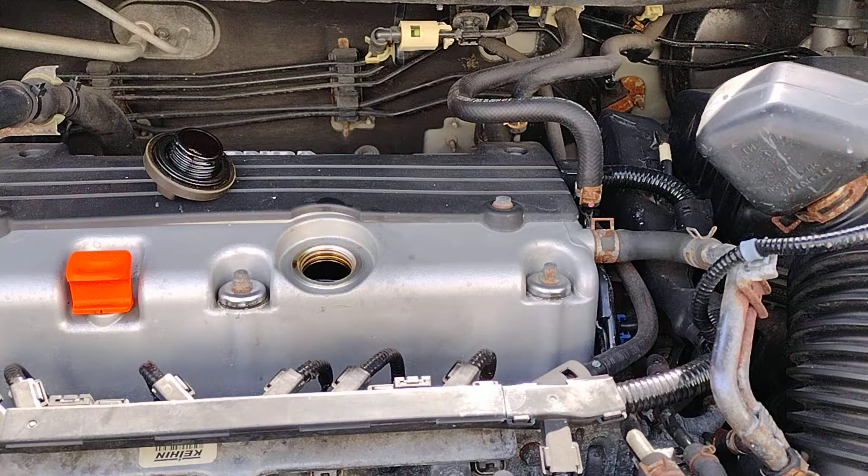Alright. Well, I have a lot of gunk in the engine. It's a 2010 Honda CR-V. The oil was very low. I had to add a little bit of oil, and actually there was like a quart and a half.

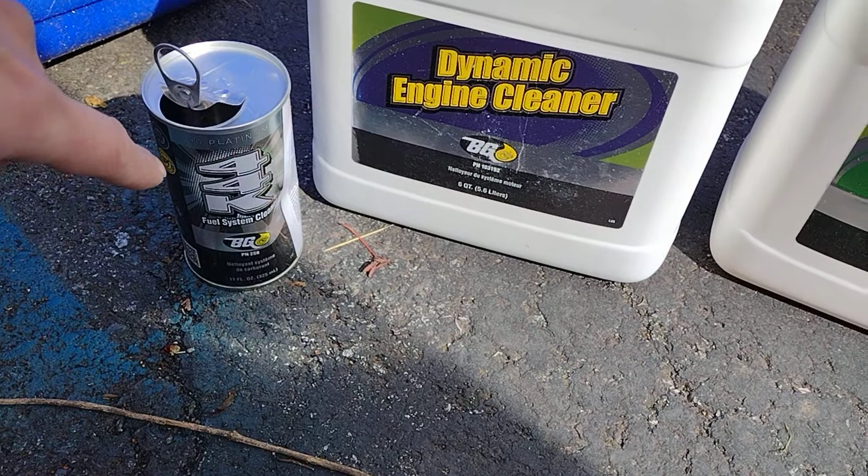So what I'm gonna try to do is I'm gonna kind of like clean the inside of the engine, and I have a product for that. I ended up buying this product. This is from BG. It's basically a dynamic engine cleaner, and you have the rinse oil. It comes with an oil additive. They call it the MOA, and it comes with the Platinum 44K. This is a fuel system cleaner.

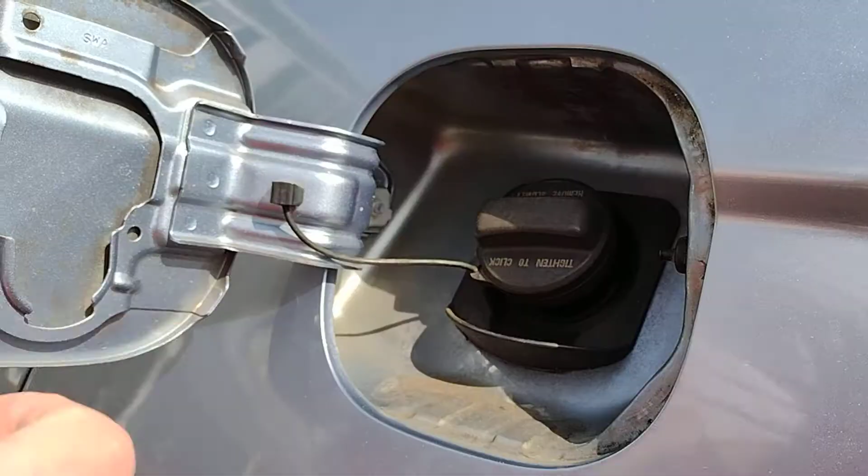I'm just gonna go through the whole process. I figure I'll just record it and show you how I do it. Alright, so what you gotta do is you gotta open up your... By the way, you gotta fill up your tank first. So make sure you fill up the tank in the gas station. Then you put the funnel in.

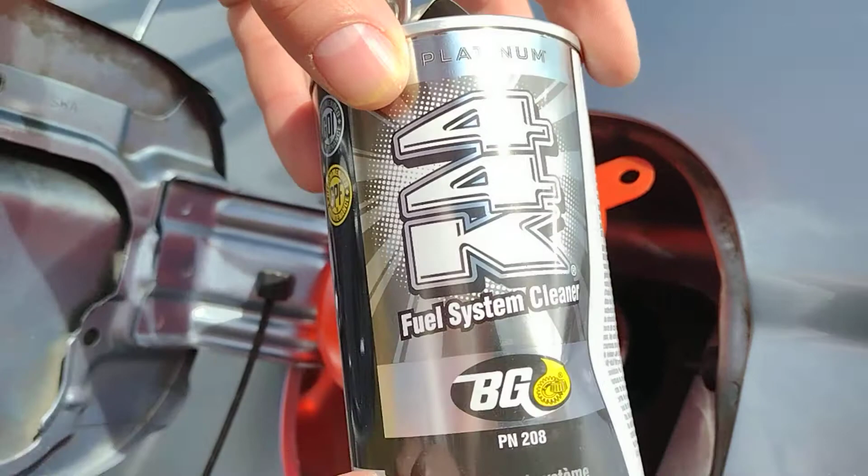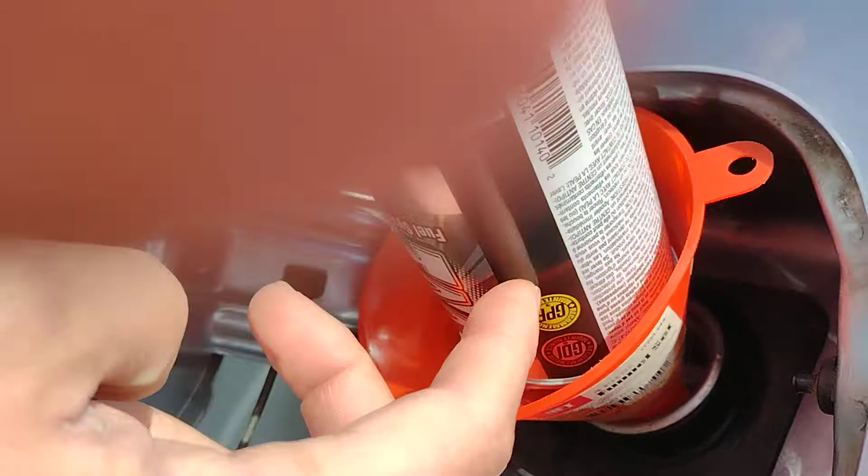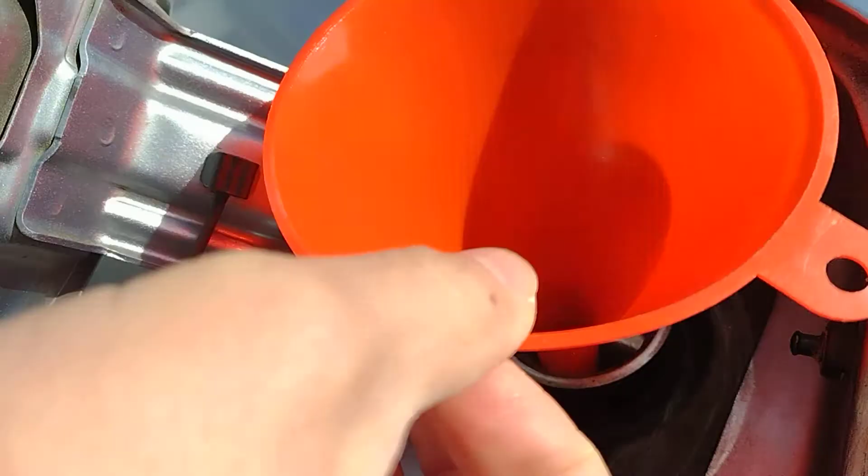You take the 44K, the fuel system cleaner. Open it, and this one is already open. And you just pour the liquid in there. And you just pour it until everything is done. See, it's almost like just dripping a little bit, but this one should be done now. So now once you do that, you can remove this and close the gas cap.

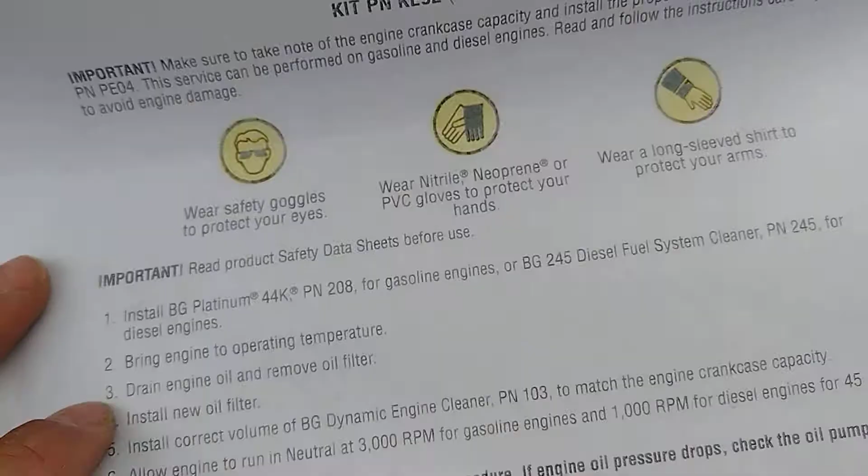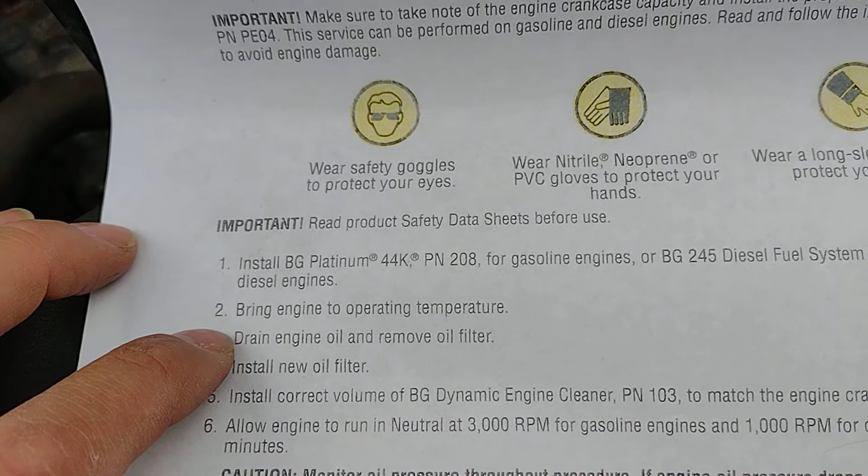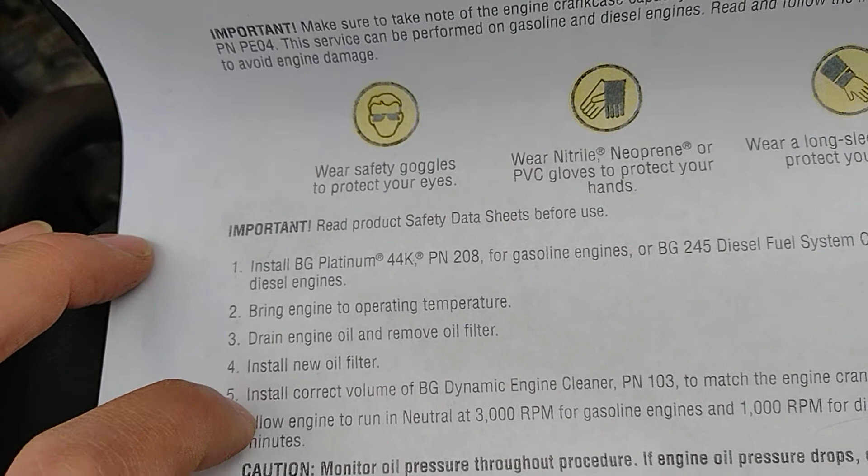So the good thing is that this product comes with instructions. So it basically tells you to install the 44K first into the gas tank, and then you bring the engine to operating temperature. That's what we're gonna do next. And after that, we're going to drain the engine oil and remove the filter, and we're going to install a new filter, and then we're going to add the correct amount of engine cleaner.

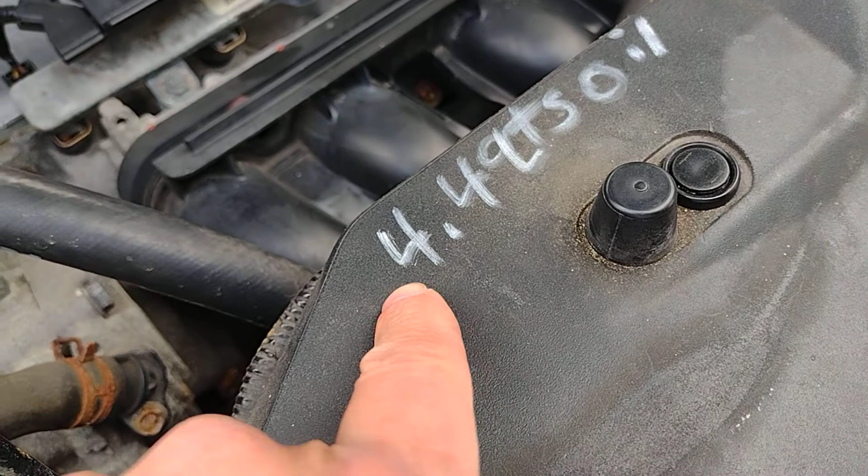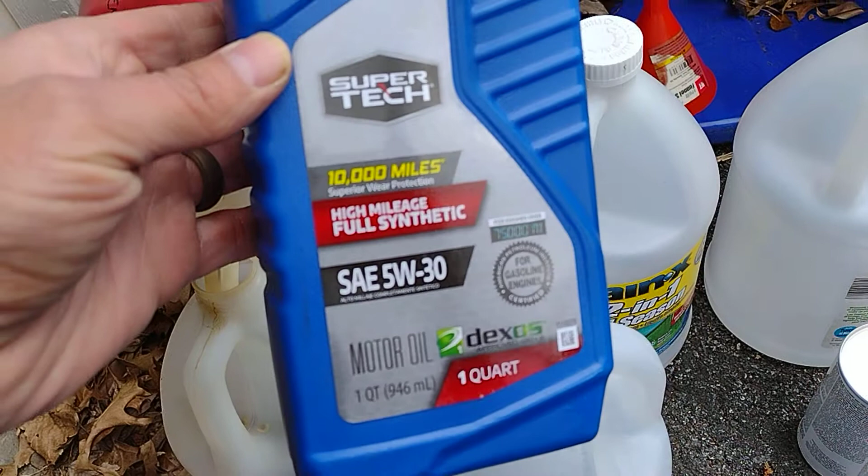Now for this Honda, I marked it as 4.4 quarts of oil that I need, so therefore I'm going to add 4.4 quarts of the engine cleaner. And how am I going to do that? I have a quart of old engine oil that I had sitting around. So I threw this out. Obviously, this is for a different vehicle, 5W30, so it's not for this vehicle.

So I just took the oil, threw it out, whatever I had in there, and I'm gonna be using this as my measuring cup. So I'm gonna put 4.25 of the cleaner. I'm gonna pour it in here, and I'm just gonna put it in the engine. And not 4.25, but 4.4 quarts of the engine cleaner is gonna go into the engine.

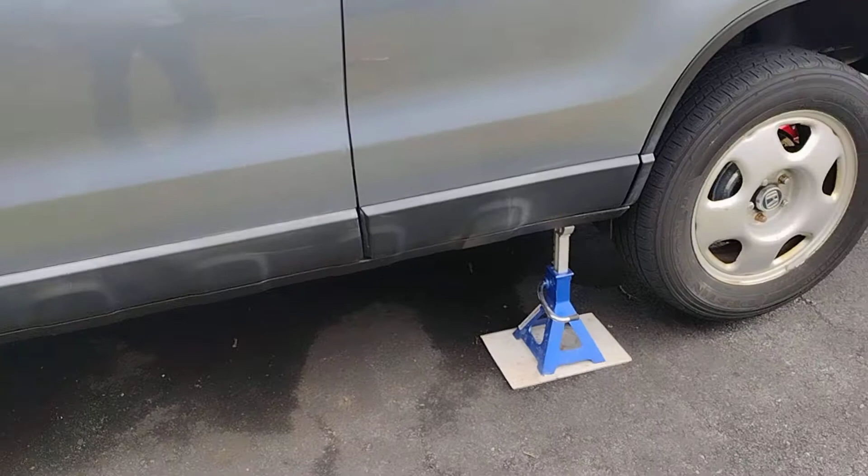Make sure your car is basically more or less horizontal or on a horizontal ground. If not, you can either adjust it by raising it with a jack and try to make it level, or if not, just try to make sure that you park it at a place that is relatively level.

Well, here I am in the car. What I'm gonna do is I'm gonna turn the car on and make sure that I watch the monitor, make sure that the engine temperature goes up to operating temperature, and that's when we can start the whole process. So first we turn on the ignition, turn the car on, so engine's on, and as you can tell, let's focus this.

There you go. So it's not to operating temperature, but you know it's a little bit warm. So I'm gonna wait until it basically reaches somewhere around this area where it's operating temperature, and once it reaches that, we start the whole process. Car is at operating temperature, so now shut it off. Now we gotta get under the car and drain the oil.

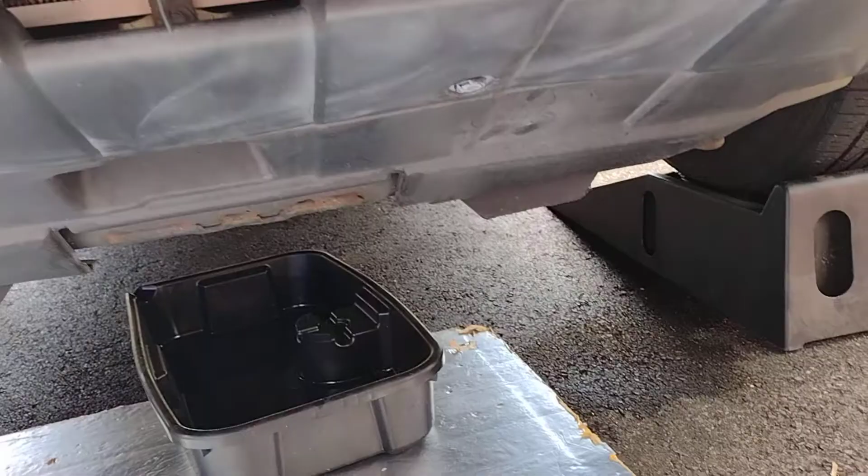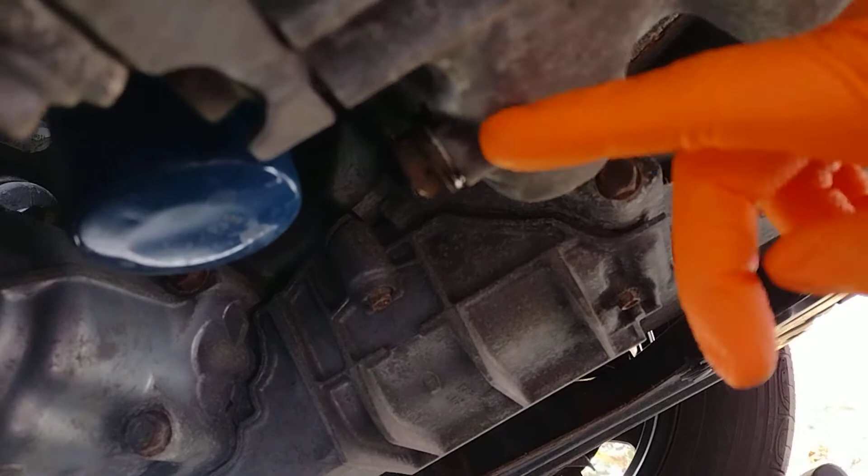All right, so this is the front of the car. I'm gonna go under and get to the drain plug, which if you notice, that's the filter right there, the oil filter. So right next to it, this is the oil plug, the drain plug, and what we're gonna do is we're gonna remove it. Now I loosened it already, and what we gotta do is just try to remove this.

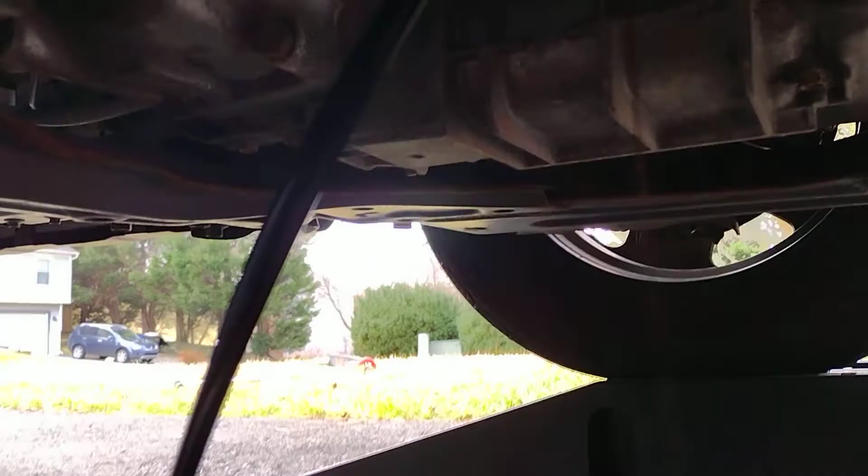Let me see if I can do it. Here we go. Almost there. Oh, great. Alright, so just let it drain. And once it completely drains, I'll come back and show you what we have.

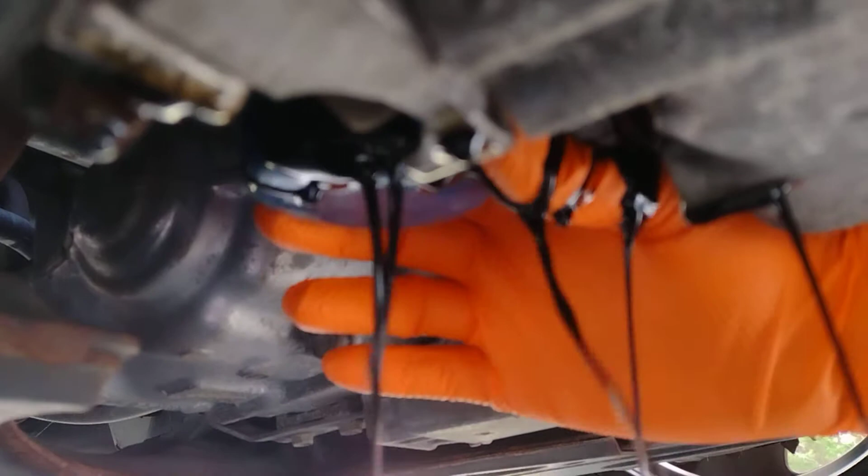And to save time, since this is still draining, I'm going to try to remove the oil filter. So yeah, I loosened it up already. There you go. Let it drain a little bit. Alright, so now keep going.

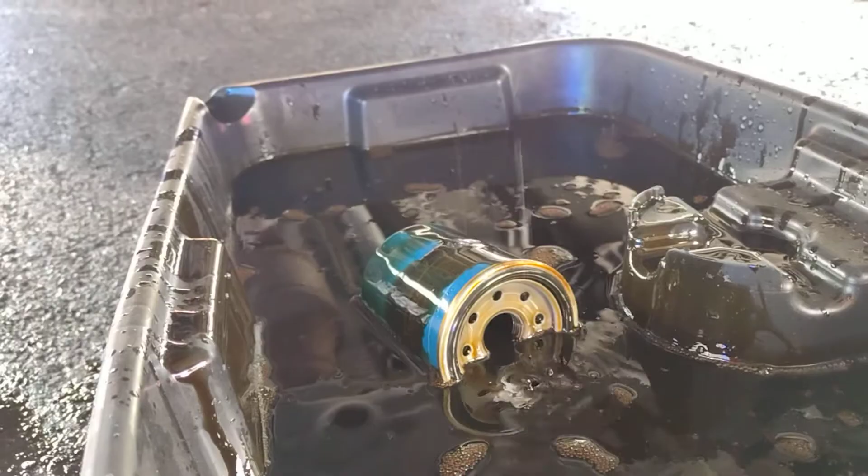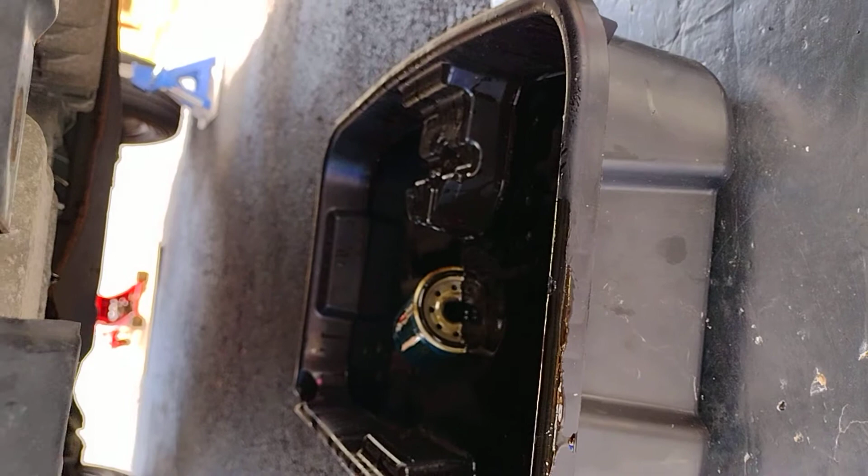So, this is where it landed. So now it's gonna let everything drain. While it's draining, new oil filter. This is a new one. I wanna basically install it, and this is basically done. So I'm just gonna put the drain plug back on, and I'm gonna put a new filter.

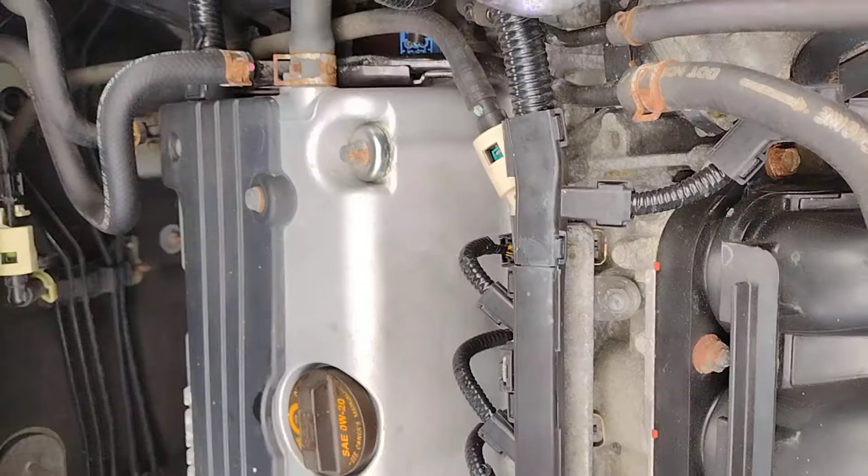I guess you don't have to see how it's put, but make sure that when you install the new filter, you do it hand tight. Don't go crazy and tighten it too much. And now that we have a new drain plug and new filter, now I gotta add the cleaner in here.

So again, this oil 1 quart container, and I'm gonna be adding the engine cleaner, and I'm gonna use 4 of these 1 quart containers, and I'll figure out how to measure 0.4 of a quart, which will be somewhere around that 12 mark.

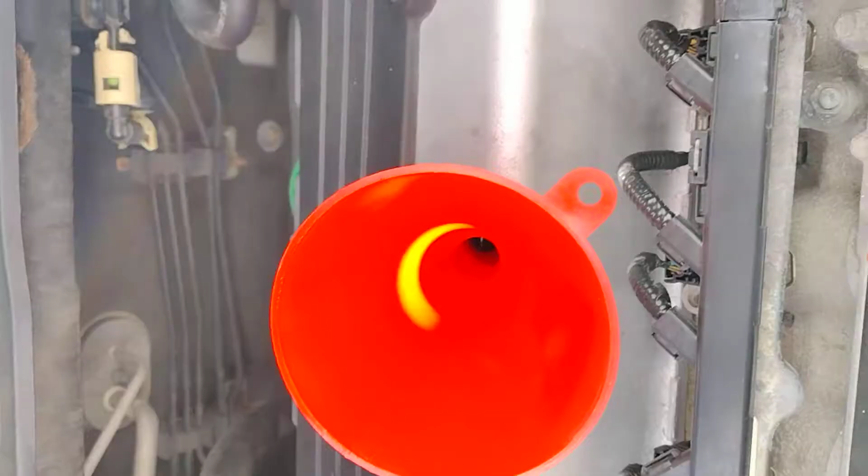So let's see what we do with it, and then I'll use a dipstick just to make sure it's level to the right amount of fluid in there. If not, I'll just add a little more, or let's see what happens. Alright, here's go number 1. It looks basically just like oil, and it feels slightly more fluid than oil.

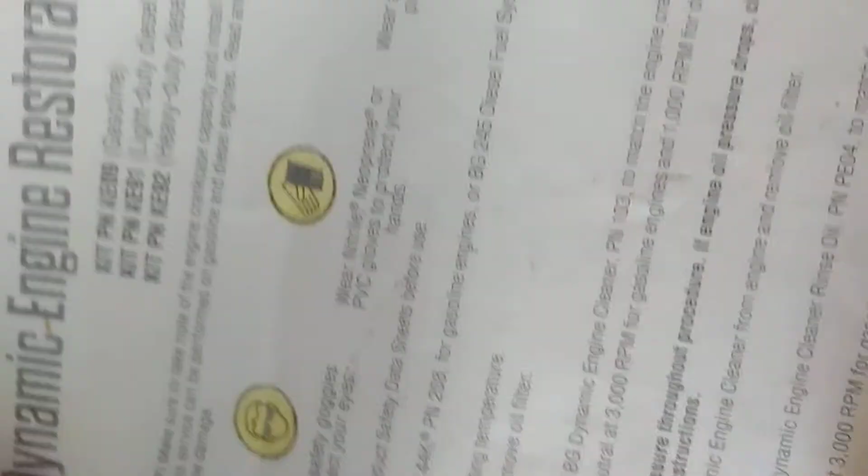So once you're done with pouring the fluid in, now we're gonna go to step number 6. It says allow the engine to run in neutral at 3,000 RPM. Yes, for gasoline engine, that's what we have here. So that's what I'm gonna do next. We're gonna let it run at 3,000 RPM for 45 minutes.

The first thing you want to do is make sure you have the emergency brake on. So the way you do that is right at the left hand side by your foot is this lever here. See, it says push on, push off. It's all the way in already. So you gotta have that down. And next, I'm gonna turn on the car.

And remember, it's 45 minutes at 3,000 RPM. Oops, there we go. Great. Let me see if it focuses. Alright, so you see that big number 3 there? That's 3,000 RPM right there. So make sure that when you're pressing the gas, you keep it at about 3,000 RPM. You don't have to be exact, but just be very near that.

And just put your car on neutral. So I hit the brake, put it on neutral, and let go of it slowly. Just make sure that it's not moving or anything. If it is, you just put it on park. I think it doesn't make a difference. And then you want this gas to go at 3,000 RPM. Let's see if I can get this to focus again.

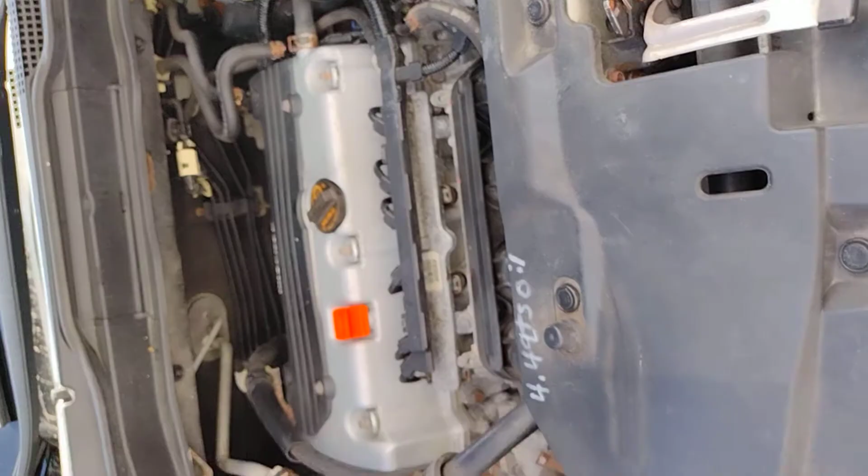It's been 30 minutes running. What you want to do is constantly monitor that there's no oil draining from the bottom. Make sure that the temperature of the car remains normal. Let me see if I can focus on this. There you go. The temperature remains normal. Again, it's at 3,000 RPM. I put some bricks here to help me, because I don't want to sit inside this car for 45 minutes just holding down the gas.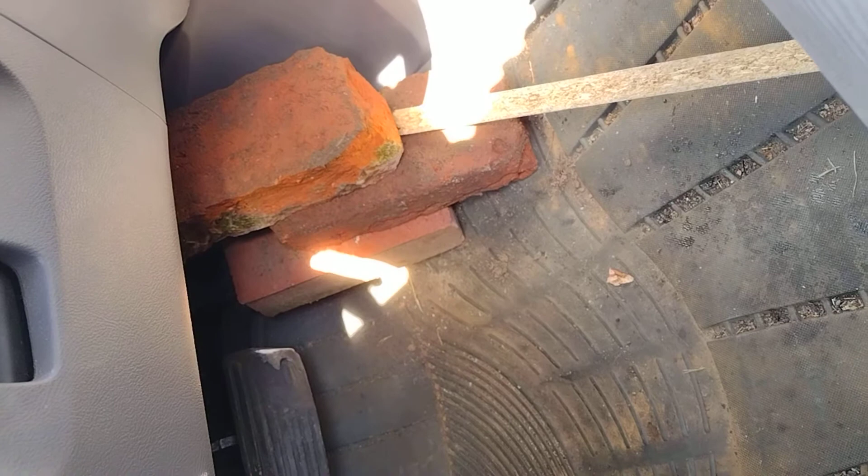But so far 30 minutes has passed by. Everything looks normal. I listen for sounds to see if I hear anything abnormal, like a banging sound in the engine. So everything sounds good. No oil draining out of anywhere on the bottom. So that's a good sign. So things like that, you want to be monitoring. Maybe every 10 minutes you come through just to check on it, or have somebody check for you. But so far so good. I'll come back when I reach 45 minutes.

So the next step is that we're immediately going to drain the cleaner, and then we're going to remove the oil filter. So we got to do those things right after we turn off the car. That means the fluid is going to be very, very hot. So you got to be careful. Because of that, I'm not gonna record that part of it. I'm just gonna remove it pretty quickly, because I need both hands to make sure that I don't burn myself.

But all you have to do is basically take the drain plug and drain the fluid out, and then change the oil filter. And then what we're gonna do next, right after that, is install a new oil filter, and then we're gonna add the rinse oil that comes with the engine cleaner. So I'll show you that in a moment. 45 minutes passed, so I'll turn off the engine.

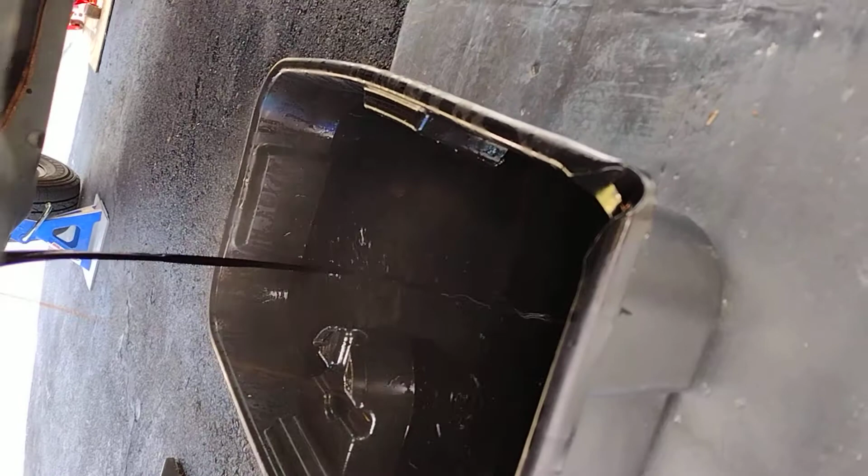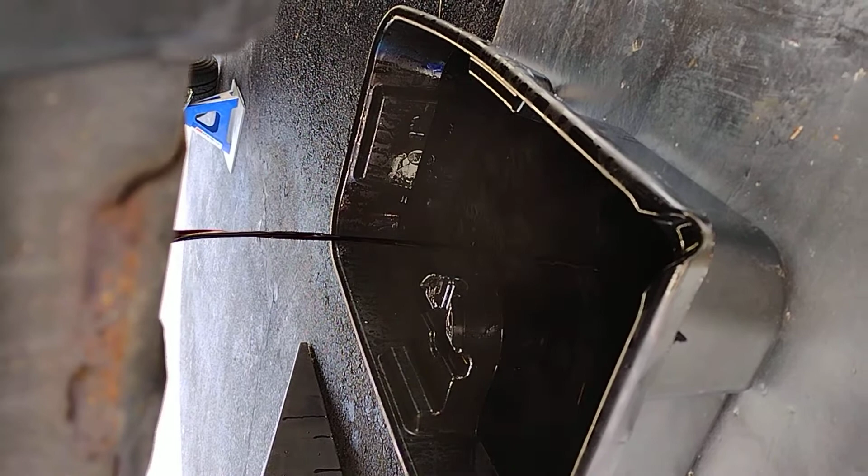Look how hot this is. It's basically smoking. So that's the reason why you have to be very careful when you do this. You can see the liquid is very dark, just like the oil earlier. So just be very careful when you're removing the drain plug in this case. So this is how the fluid looks when it comes out. It's very dark. So hopefully that includes a lot of the gunk that was in there.

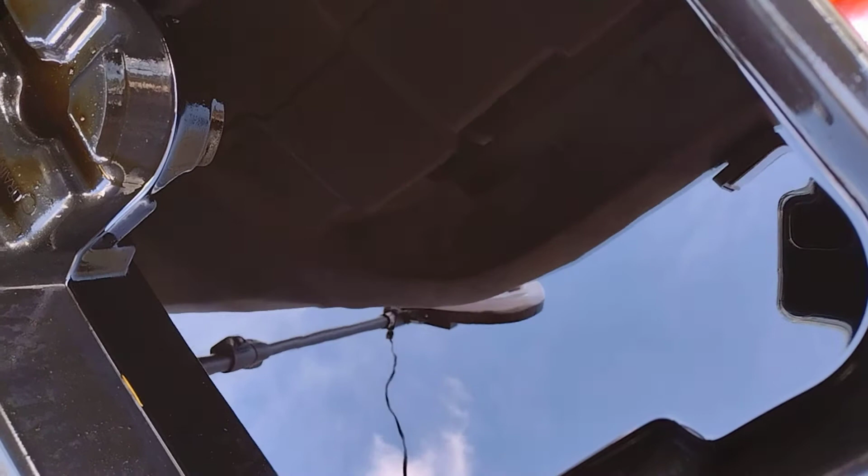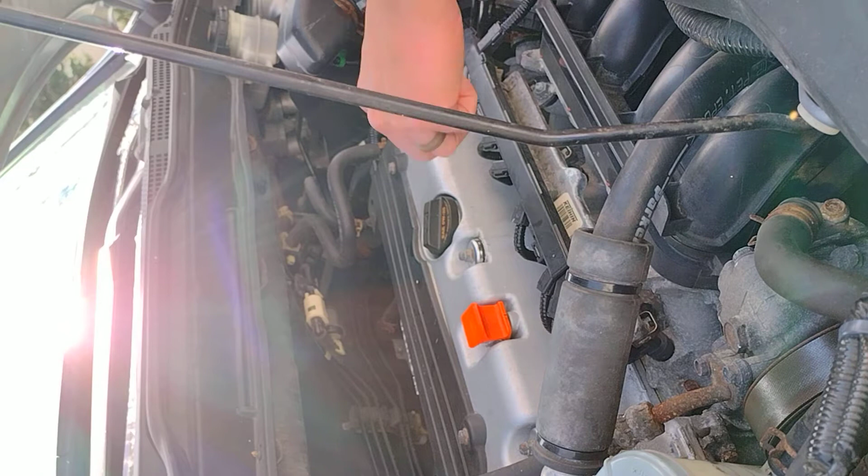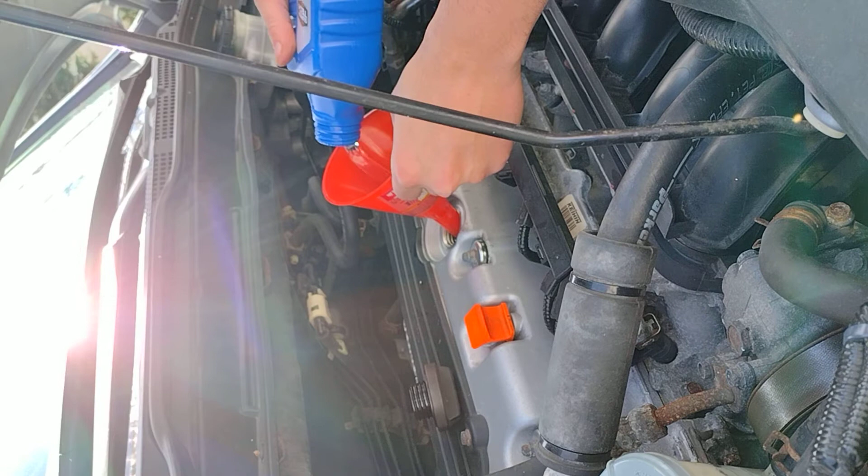So now let's get to the engine, and I'm gonna be pouring in the rinsing oil. This is the same exact thing I did before. I'm gonna put in the 4.4 quarts of the rinsing oil, and if you have a different vehicle, just make sure you know how many quarts of oil it takes, and then the rinser is the same amount. So there's 1 quart in. And again, remember I replaced the oil filter already, and I put the drain plug back on, because you have to replace the oil filter after every drain.

So I'm not gonna bore you with this. I'm gonna do 4 quarts. This is my first quart of the rinser, and again I'm using the 1 quart oil container that I had. That helps me measure the amount of quarts that I'm putting in. Well, this is gonna be the last one. I already put 4 quarts. It's gonna be 0.4 quarts that I'm putting in now. This liquid feels almost soapy, like it runs almost like hand soap.

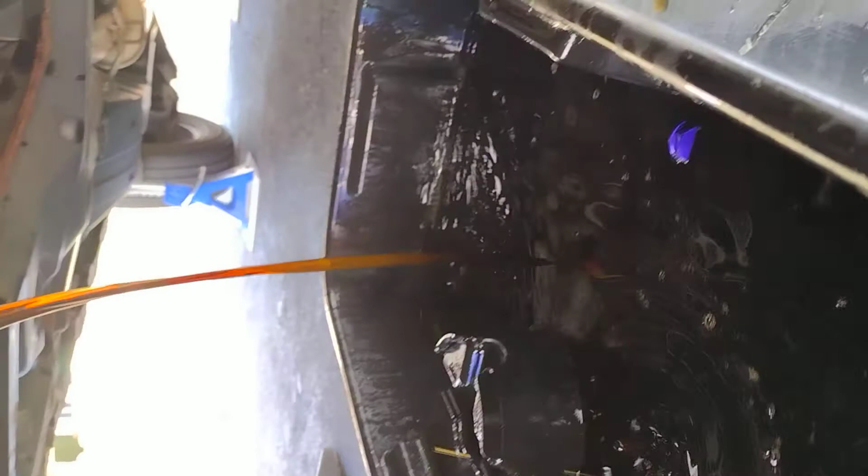So turn off the car because it already reached 20 minutes. I'm gonna put the car back on park, and let's go take a look at the fluid that comes out of the car. Alright, so this is how the fluid looks. It basically looks like oil. That's the rinser coming out of the engine. It's still a little bit hot, but it's not as hot as the other one. It's still throwing smoke. So we're gonna wait until this drains out. I'm gonna remove the oil filter after.